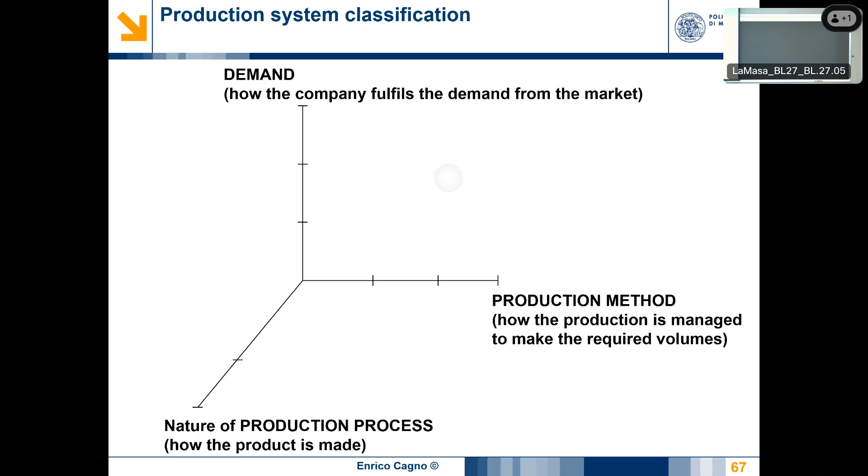If you remember, last time we started considering the classification by the nature of the process, and introduced the differences between process production and discrete production, also referred to as manufacturing, even if manufacturing has in the last years become a little bit more ambiguous in meaning. Within discrete manufacturing, we will find both fabrication and assembly.

What is the idea of process production? Let's make a reference with products. We're referring to the production of basic materials like cement, like gas, like plastics, okay? They are creating, from raw material, starting material for every kind of industry, every kind of industry as we usually know it, because all these kinds of industries stay in discrete manufacturing.

Okay, why this one? Because we start with oil and we transform it into plastics, we start from ore and we transform it into steel. In the end, I think none of us has ever gotten in touch with a steel bar as a final product. But many of you have seen how this bar is transformed through discrete manufacturing into desks, into cars, into bags, into every kind of thing. This is also the reason why process industry is usually seen as a supplier of the discrete production industry.

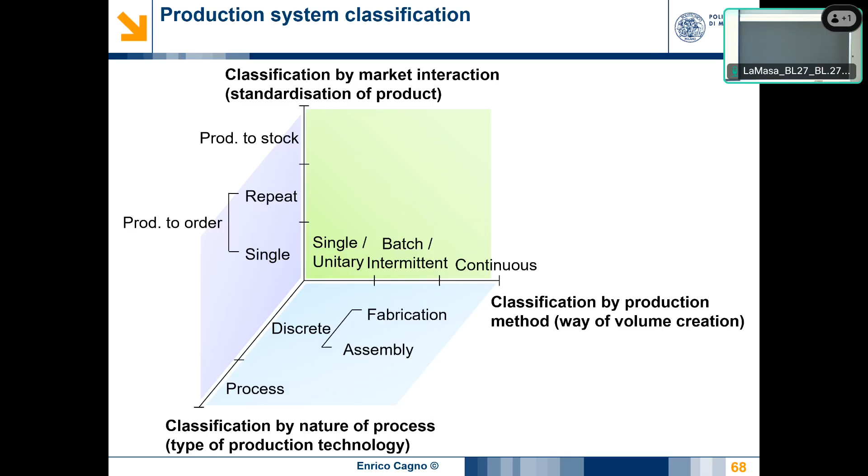Last time we also focused on the characteristics of process production. And we said that usually in this kind of process production, you have one plant for one product, or a limited number of products. If you make reference to a refinery, you have one raw material in, and maybe you can have different products, gasoline, kerosene, whatever, but in the end a very small range of output. With cement, as we said last time, kaolin, whatever, all the ore coming in, and in the end you have cement. Maybe you have different variations of cement, but in the end it's cement. If you go with glass, it's the same. This is the idea.

What is the other characteristic of this kind of process production? It is that the technology route is completely fixed.

So one operation follows the other, and we cannot swap, change, or skip any of them. We have to follow them in a perfect way. The idea is that if we need to warm or heat some of these ingredients, say of the glass or the cement, we have to use that specific temperature, that specific speed of flow.

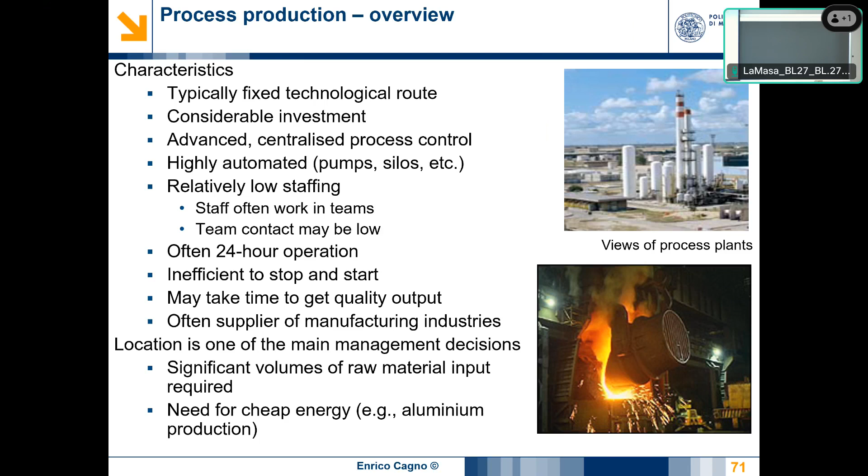If you remember, last time we divided the features of this kind of process production by technology, by management, and by cost structure. We will use these same three categories to analyze the features of all the production processes we are going to see.

High level of automation. The process flow can, to some extent, be flexible. In the end, you have a lot of ingredients put together, so it's synthetic if you want. You can have different kinds of cement or glass in the end—very limited in terms of categories, but you can have different products.

Management, so decisions—what decisions you have to take. We say that mainly we have this relative importance of management parameters. Please remember, you start the machine, you stop the machine. A major decision about how to manage this kind of production system is how and when to make maintenance. This is the idea.

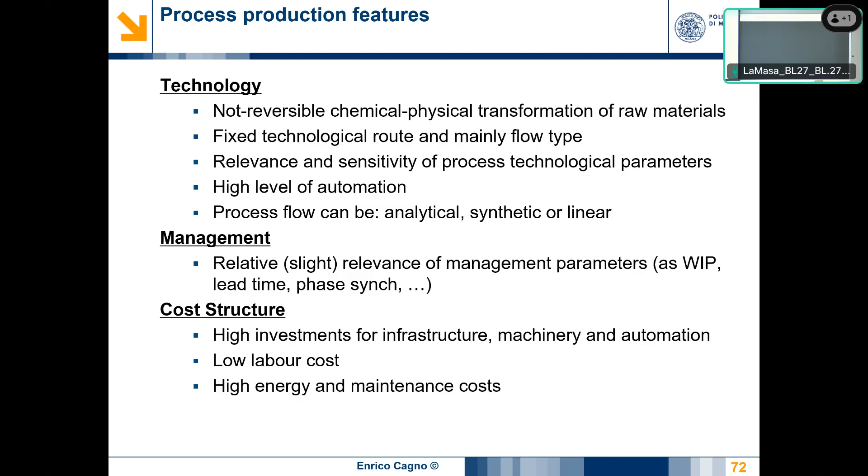Now let's jump into the discrete production. Sorry, these are our examples for nylon and cement.

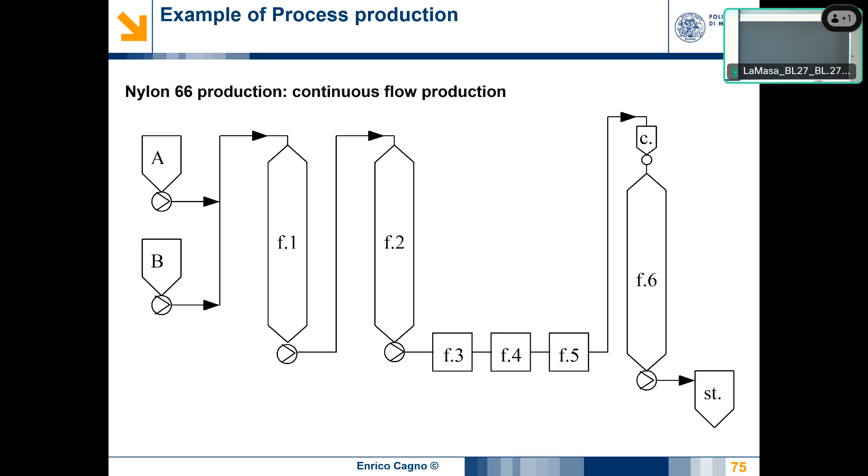So, discrete production, manufacturing—as I told you before, discrete manufacturing or manufacturing. We will make reference to fabrication or processing, and assembly. This is the terminology we are going to adopt.

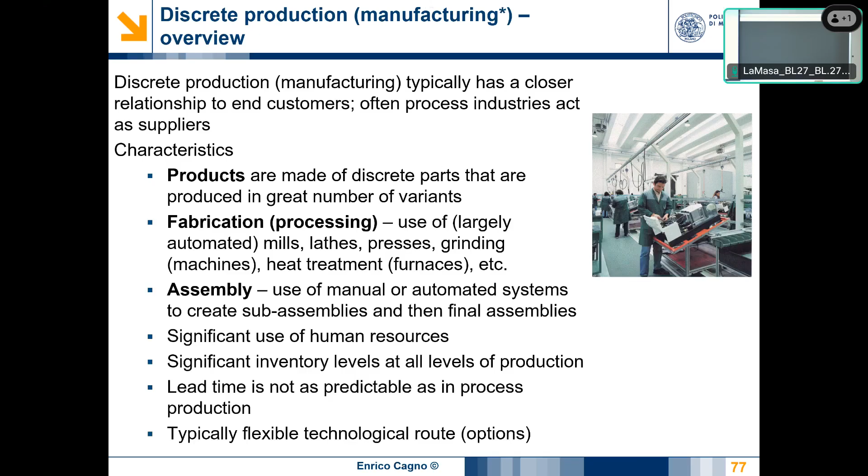Maybe the easiest way is to take a look at this big tree presenting all the manufacturing processes, the microfamilies of technology that can be listed in manufacturing processes. Here we've got fabrications, here we've got assembly. I think all of you can understand which are the microfamilies.

It's clear that material removal is maybe the king of fabrication, followed by the solidification process, but I think all the others are very interesting, together with deformation. The same goes for assembly—it's to some extent a way of fastening and joining components to obtain sub-assemblies or the final product. Which are the main differences among those?

Historically speaking, the main difference between fabrication and assembly is that fabrication has technologies with transformations that are not reversible. What is the idea? If I remove material, this is a non-reversible operation. If I cut, it's not reversible. If I form some pieces, to some extent I cannot go back.

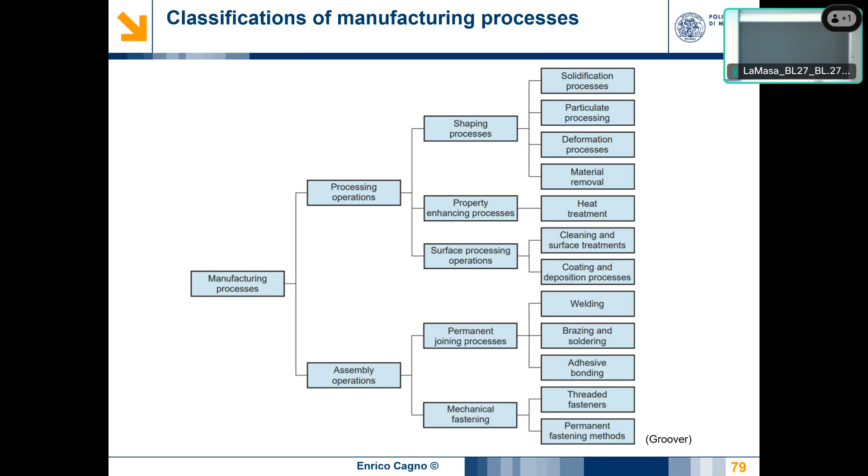Now, if we go to fabrication, again we are analyzing it by technology, management, and cost structure in order to see the difference between process, production, and then assembly manufacturing. We can say that fabrication should be not reversible in most cases.

The other difference, with respect to process production, is that there is no fixed route. Very interesting. If we are back to the camshaft, what if we swap the cutting of the edge with the first run in terms of lathe? Nothing, because we obtain the same product. Maybe it's always better to cut it, head it, and then start turning. But this is an optimization of the process. It is not due, because at the end we obtain the same object.

Maybe with the first one we are less rejected, we are faster, okay, but we can swap some of these operations. Second, I said that a camshaft is usually obtained, at least in the first round of the operation, by turning. Why? Why can't we go with milling? Is it possible? Absolutely yes. Is it optimized? Less. Especially when we have large volumes, it's far better to go with turning, no way.

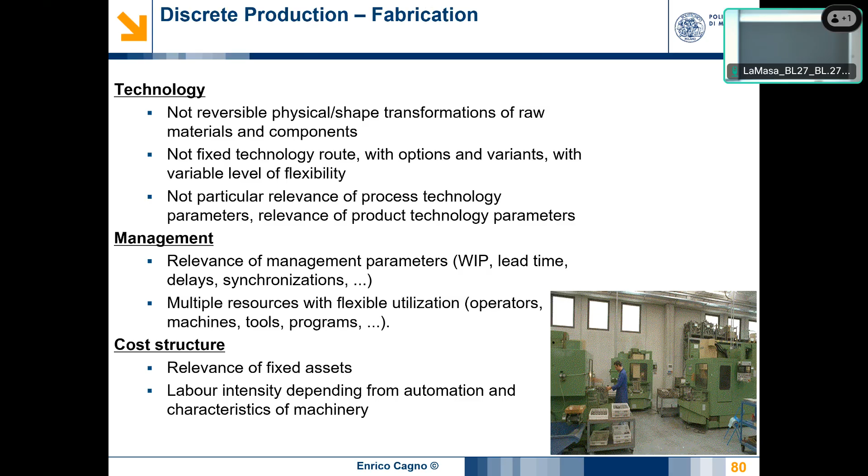Let's go with assembly. Sorry, just to make a note. All this, as I told you before, those of you that followed the course in the 3rd year already know; it is to some extent a repetition with some hints. All the others, if you have problems with this, please come back to me. I will try to repeat the main concepts, but a bachelor student of Politecnico spent some time on this before, so if you need some extras, please come back to me, okay?

Assembly: technology, management, cost structure. Technology, what is the idea? Not completely reversible, but the idea is that if we assemble 2 components, we can maybe separate them. And please remember the definition of discrete production: in the final product, both for fabrication and for assembly, you can recognize and identify the single components. If you see the car, you can see the different components. If you see the single components, it's easier to think that we can separate them, true or not.

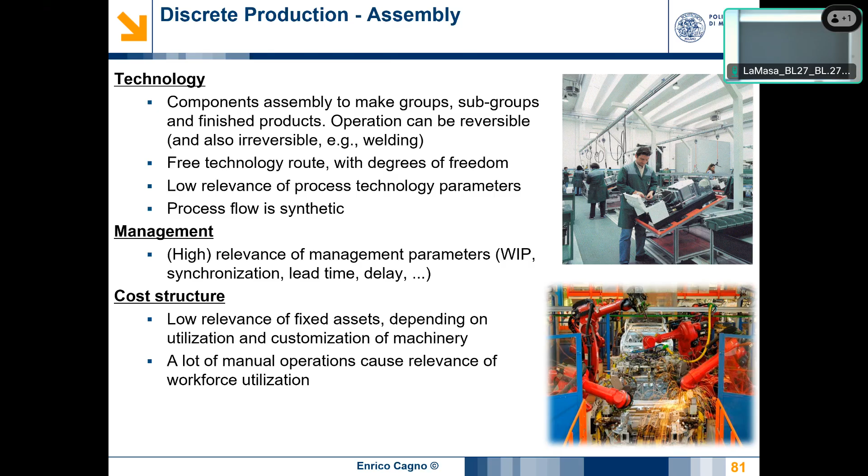Okay, here assembly for planes, assembly for mechanical components, and before that one, we have fabrication. Please also always remember what I told you at the very beginning. If you go into a factory, you can find both process production and fabrication. Process production, fabrication, and assembly. Only fabrication, only assembly, only process production and assembly. The combinations are a number, okay?

And please also remember that you can have process production and assembly, because all the components maybe are worked by a third party, a supplier. So you produce a steel bar in your foundry, and you have all the fabrication operations done by a neighbor, and then they are back for final assembly. It sounds strange, but in the end, usually it's a matter of cost. You try to minimize the cost, maximizing the profit to some extent.

This is the idea. Nowadays, I'm in a litigation. It's called international arbitration, for some kind of e-bike, a bike with batteries, with an electric engine. Because they have to understand that this bike is sold in Italy, the final part is assembled in Italy, the main body is assembled in Turkey, the main subcomponent is assembled in Thailand, and most of the components come from China. Normal.

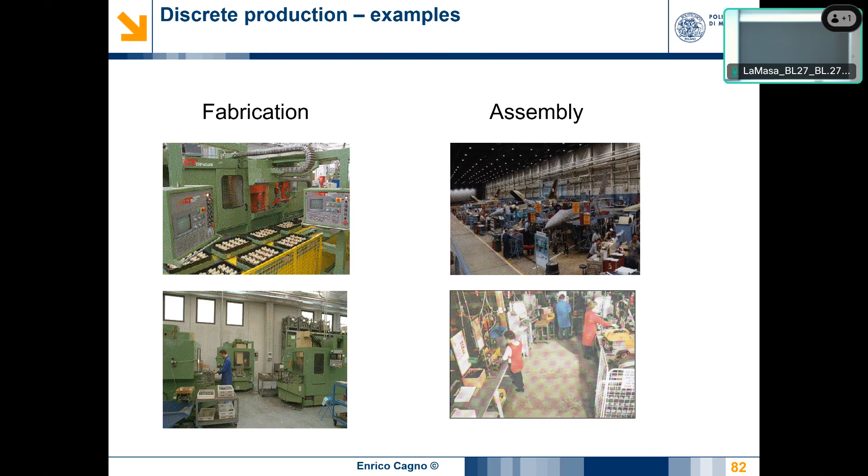Now, manufacturing, discrete production is preferred. Here you have fabrication or processing. Here we have assembly. And these are listed the different main kinds of production systems for fabrication and for assembly. We will use this scheme in order to have techniques for each of them. So I stop here, but in 15 days, I think, we will be back here exactly, and we will start working with each of them.

I don't want to go into it, but one thing, again: in the same factory, you can find process production together with fabrication production, together with assembly production. In the same factory, you can find a job shop together with a transfer line, together with an assembly shop. So we will learn how to design and manage each of them, but most of the time there are hybrid situations, and we will try to think what is the best one. Please remember this, because I need to separate them, but at the end we need also to merge them into the real factory.

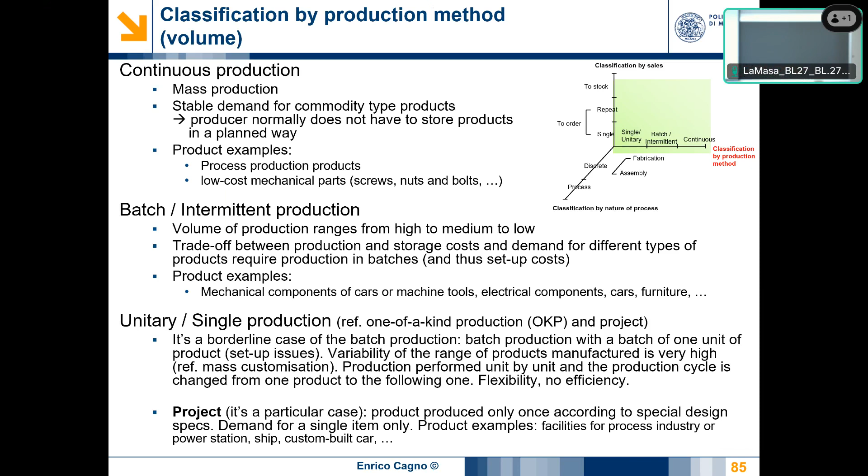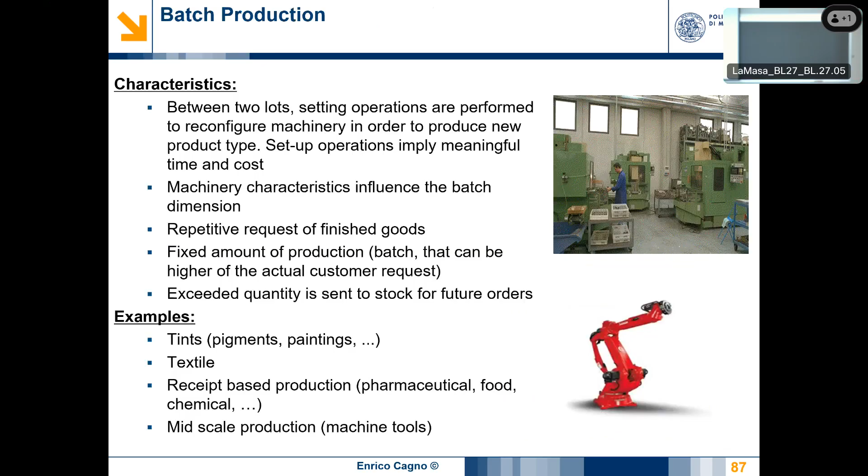There is a correlation between the volume, the annual demand of a product. You see, these are all the products that are requested to my company. I'm making an ABC, so the most requested, down to low volumes. The first one is the most requested product, so the volume is big, we have to define it, but say it's big. This is a medium volume, this is low volume. If we look at the quantities, if we have very high volume, we can go for more continuous production. I don't say process, but continuous production.

If we go for low volume, I would prefer, in order to saturate machines, to have all these products made on the same machines with a setup for changing from one to the other. So I have to produce, say, 100 pieces of 1,000 different models. All this set of products will be produced in this part of the plant, so I need the setup for changing from one to the other. After that, we have medium volume. Now we are going to develop this concept. But please remember that the quantity required by the market has a strong impact on which kind of production system we can adopt.

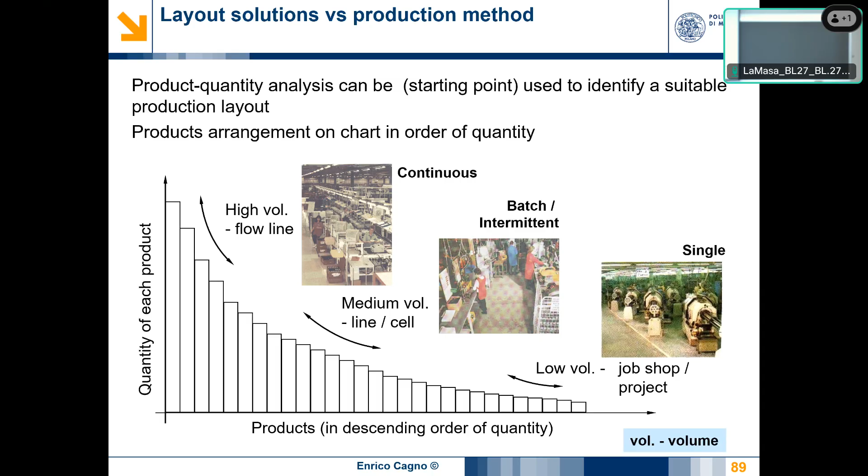Now, classification by market interaction. So I'm producing for somebody. It could be a final customer, could be an industrial customer, so the ring after mine on the supply chain. Here you can see that there are two main ways of responding to the market. One is to stock, the other is to order. What is the idea? If I'm producing to stock, it means that I will make my production and I will put it in a warehouse. And the client will be served by the warehouse.

To order is exactly the opposite. I'll be waiting for the client to issue the order, and at that point, I will start operations. These are the two different ways. Now we're going to decompose it further, but this is the idea. Either I serve from the inventory, from the stock, or I'm waiting for the order to be issued.

It's not so simple in the end, because if I produce to stock, it means that, if I don't want to go bankrupt, I know more or less what the demand will be. So I can adopt a production to stock system only if I can forecast demand quite robustly. Maybe I can make some mistakes, but in the end, I should be able to. Otherwise, if I produce something that will never be sold, I will fail.

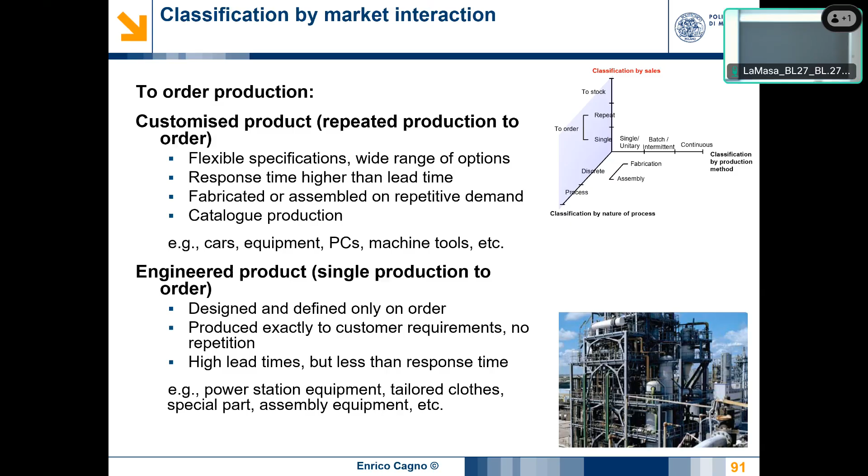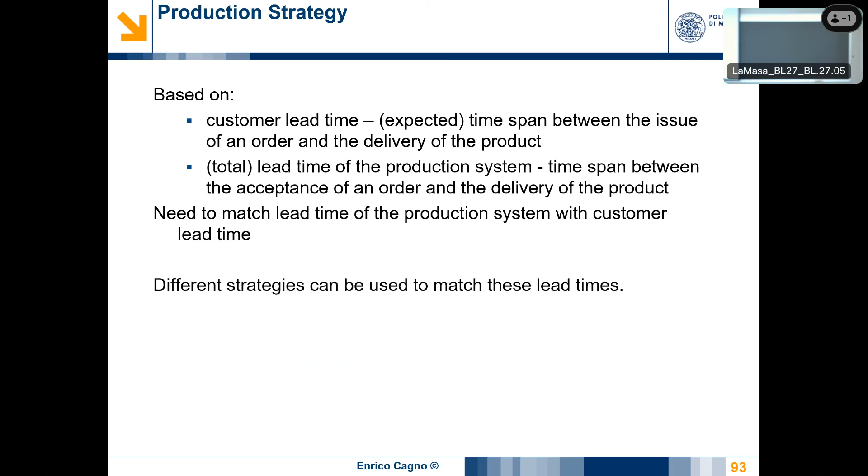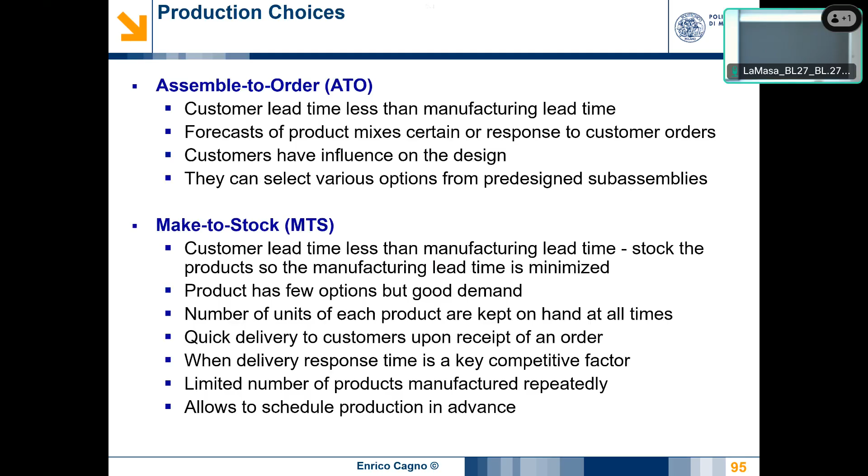We already spoke about this. As I told you, slides are like a book. I took one slide, but everything is explained afterward. If something is not clear, please come back to me, but everything is written in order to have it.

This was the process that McDonald's used up to the end of the last century, and I think all of you know it. You have raw materials: frozen patty, fresh lettuce, cheese. Then there's the process of cooking, the broiler, and the assembly process, standard by catalog, but in the end the client doesn't choose from the catalog. They assemble on the basis of demand forecast, and put the finished good on the rack, a warm rack. The customer places the order and it's delivered immediately. But remember, the assembly didn't wait for the customer order; everything was available in inventory.

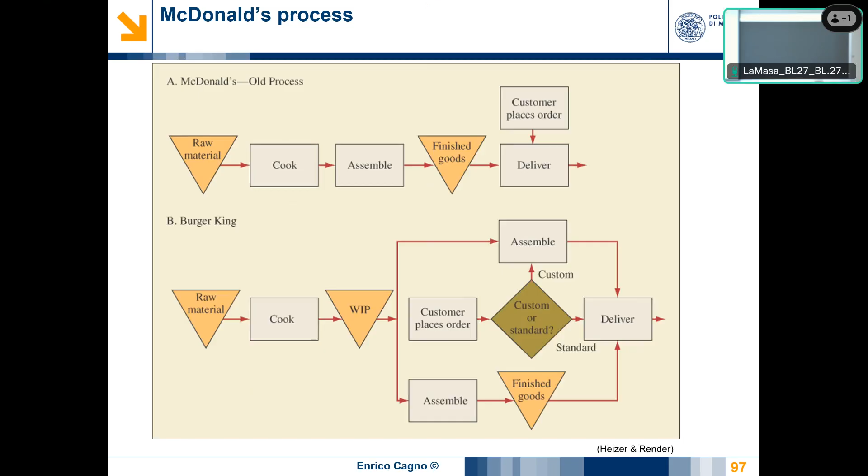So if you look at this one, remember what I told you with this scheme. Every time you go this way, we are to some extent reducing the risk of having products that are not sold. Here we have McDonald's with the final product, here Burger King, and here to some extent Wendy's, because the idea is that the grilled patty is used in every hamburger, so it will somewhere be used. There is to some extent a cancel-out of mistakes in terms of forecasting the final hamburger sandwich.

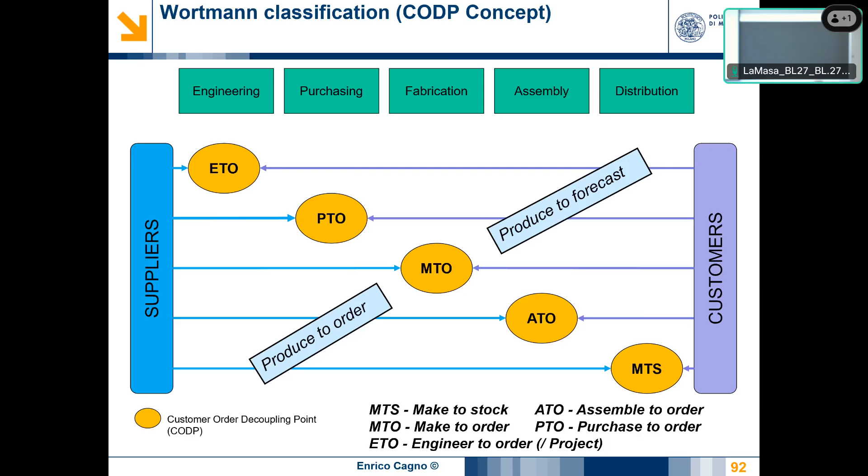Because the patty is used, it's easier to understand. Now, what was the solution? I won't go into detail, but there's also a description. There are some delays. What was the idea of the new process?

Raw material, here, okay, so a new kind of selection. New way of cooking, very similar to the one used by Burger King. A lot of investment into how to keep the grilled patty warm in the right way without losing the crispness.

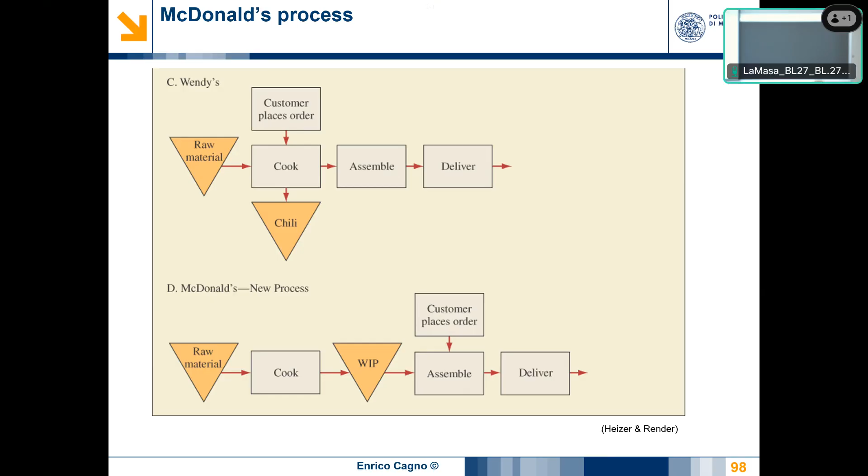The idea is they assemble when the order is placed. I don't want to go into further details, but you see all the process involved in designing it, with video screens and so on. By the way, all the things you see now in McDonald's were developed 25 years ago—exactly, there was a leap in technologies, and Burger King and Wendy's followed. Now everything is nice.

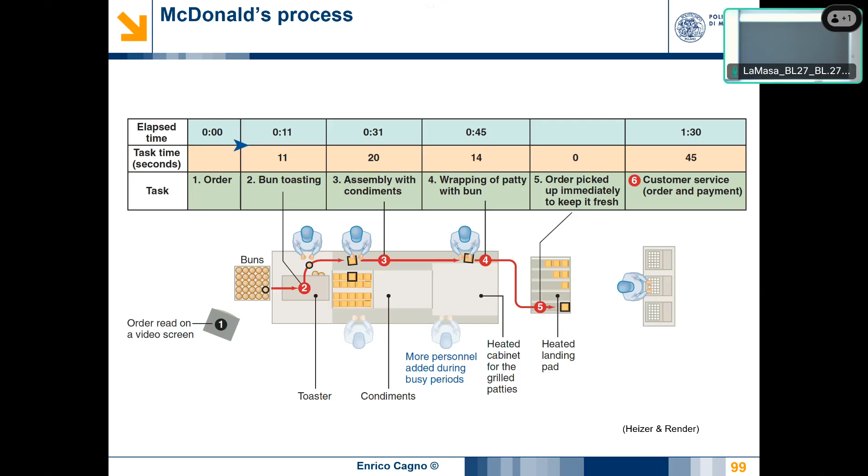We have to understand McDonald's before and after 1999. Before, it was make to stock, pure make to stock. After, with the new process, we move to let's say assemble to order—maybe something is made to order, but let's say it's closer to assemble to order. This was the switch in terms of process.

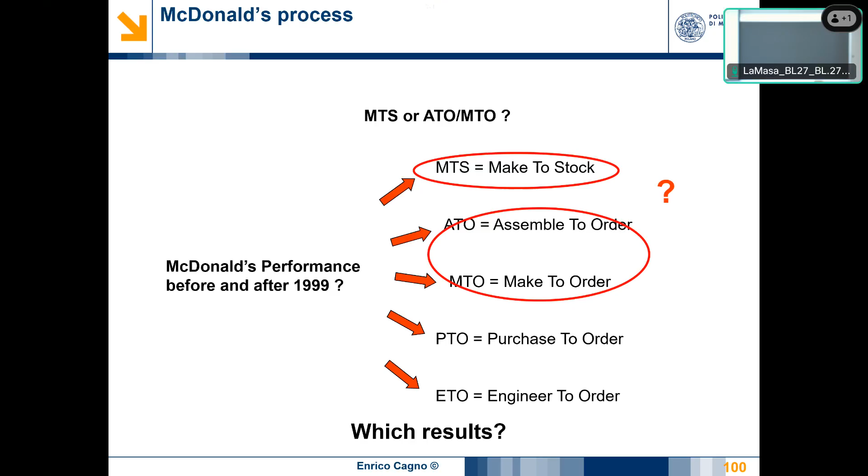So, which results? They ran some restaurants as pilot projects, and in the end they had to measure results before and after. So the criteria were production capacity, quality of the products, flexibility for the client, accuracy of the right things being done, and responsiveness.

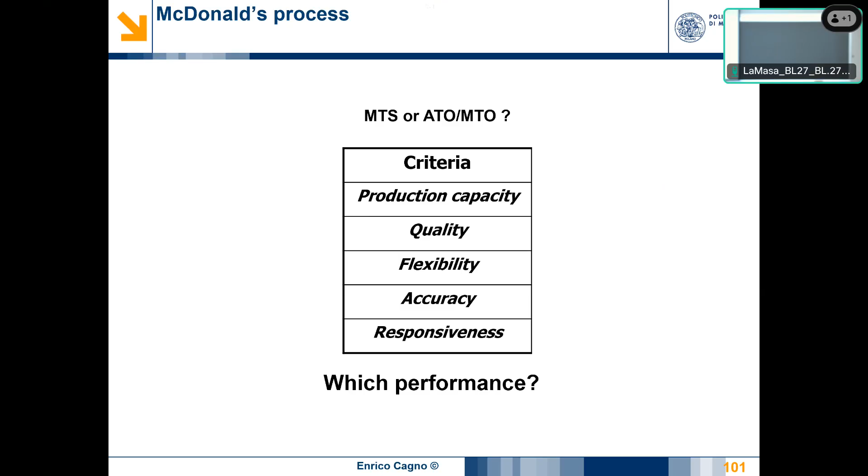Which performance? If you look at production capacity before and after, high and high, we can say that maybe capacity increased a little bit, even though we shifted from a make-to-stock to an assemble-to-order process, but technologies changed in the meantime.

Quality—low, it was a problem, that was the issue. Now it's high, comparable with all the others.

Flexibility—high before, high after, in a different way, but it changed. Accuracy—you know, I never had problems with accuracy, same with the new one. Responsiveness—time, fast food, time for serving, that was high; it was the criteria for success of fast food.

New McDonald's—relatively low. Why? Because with the new process, you have to place the order, wait some minutes, and then be served. If you're a mother coming in with four children, you say, I'd like four hamburgers, whatever you want, give me, I have to feed my children. And the point is that for the customers, this was a big issue for McDonald's.

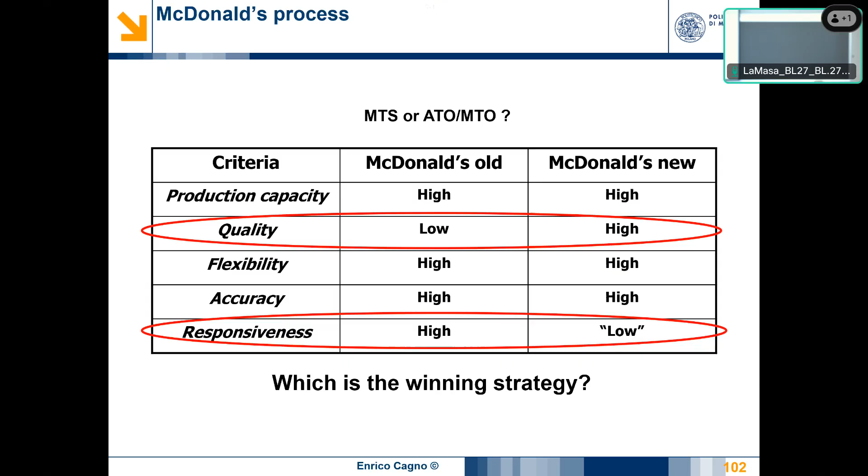In the end, they went back to make-to-stock, but they kept all the technology they developed, readapting it, the videos and everything you see now were developed 20 years ago but readapted to a make-to-stock process. This shows the importance of performance measurement, which we will start in the next block of lessons.

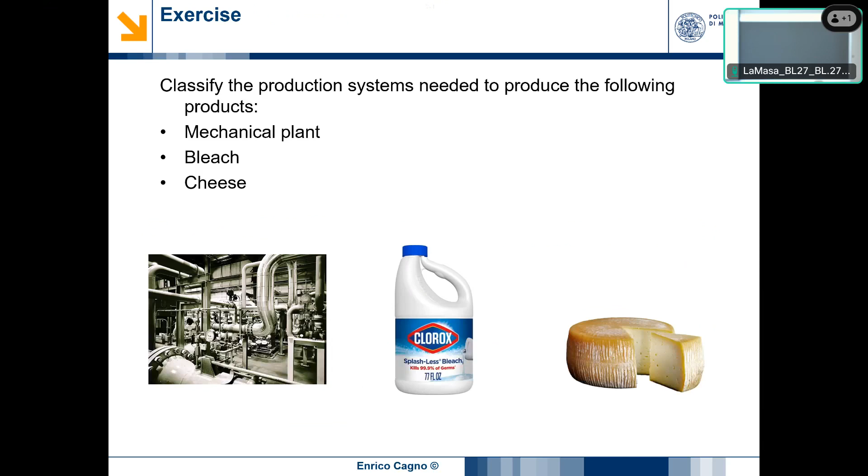So there are some examples if you want, just to...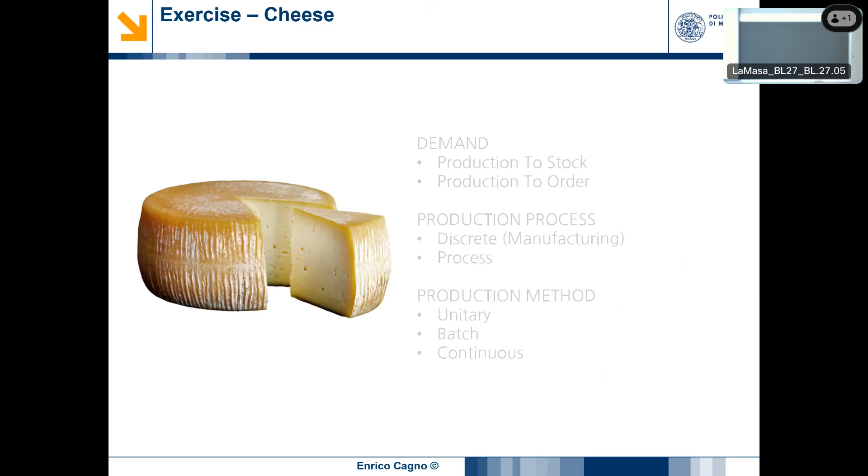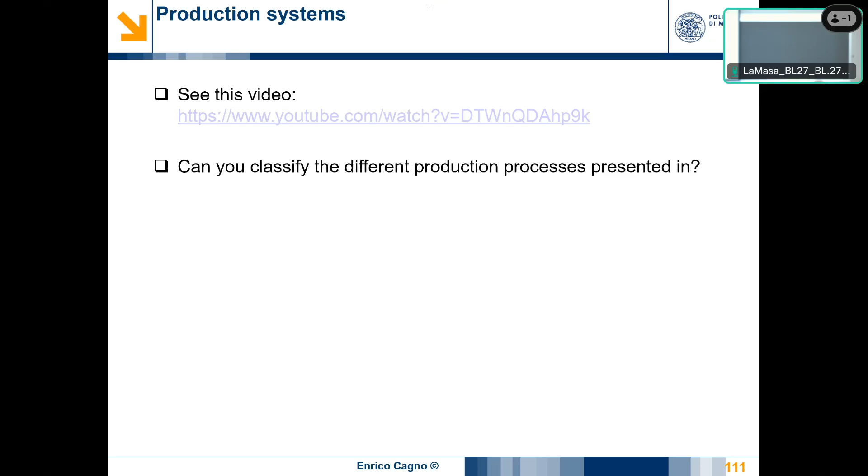Okay, you can have it. Okay. If you have problems with this, there are some videos here. Videos. Okay. With the idea of classifying that one, if you want, take your time. Just do it pretty easy. Yeah? In the end, to make it. Okay. So, see you in a quarter. Okay. If there is any question, I'm here. Again, please remind me to restart. It's my nightmare to forget.

Okay. With this block of slides, we are going to open up a new topic, that is related with performance of production systems, and I would say related products, because in the end we cannot separate, to some extent, production from production systems. Okay, what is the idea about measuring performance? We will see it in a more detailed way, but the idea is that we have to understand what's going on, also because when we have to take decisions, we have to understand if what we are planning to do will drive us to a better or worse solution. Okay.

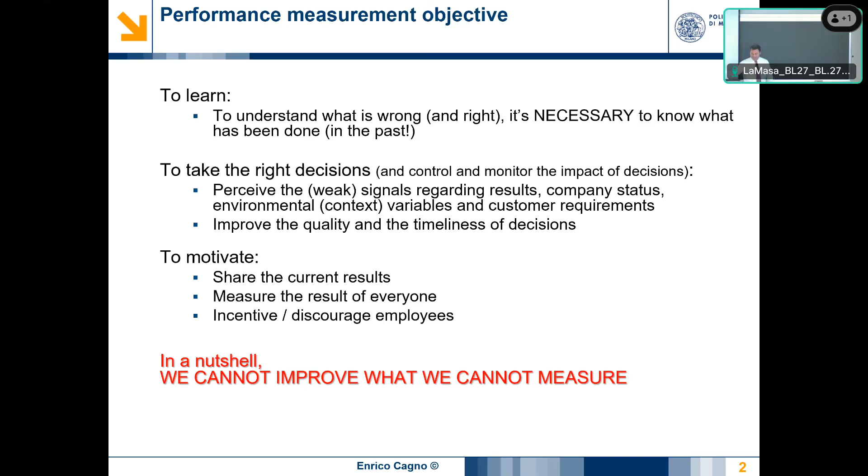Now, the framework. As I told you before, production systems are very complex systems. Machinery, humans, interface, interaction is a mess from that point. And so we have to choose the right number of indicators able to get all the information from these systems, so be systematic.

But please, on the other side, measuring a lot is an effort. So we should measure exactly, but no more than the minimum required. And this is the problem, okay? Usually we refer to this system as performance measurement system, PMS, or performance measurement framework. And the idea is to identify so-called key performance indicators. We have a number of different indexes, as I was telling some of you before.

If you go to the paper about PMS, we tried to understand how many indicators were used for manufacturing companies, and the number is close to 1,200 different indicators. Understanding which are the right ones for a company is a key objective, with the idea that for a large company, more or less 100, 150 could be the maximum.

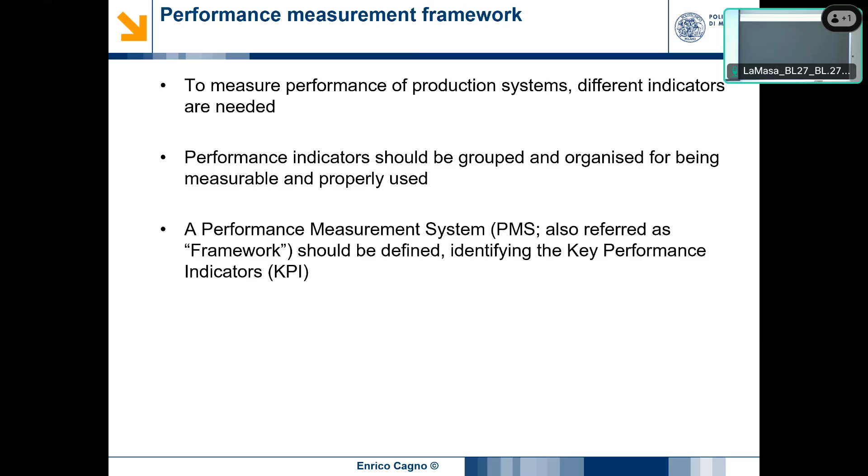I remember some years ago, I was working with Coca-Cola on one side and Nestlé on the other, and they were running with 140 and 120 indicators, indicators that they deploy in different situations, but the idea is that this is the number, this is the maximum. These are large corporations. If you're smaller, eventually it could be, to some extent, shaped in the right way.

Now, what is the idea of what we have to measure? Okay, the set of indicators. Perfect. Second, which is the metric you want to use. You will see that we will introduce some key performance indicators, examples, and in which way we can measure them. Very simple for an engineer, but okay.

The other thing is, which is the frequency of measure? Every year, every 6 months, every month, every day, every second? Nowadays with the information systems that are available, we can measure almost everything. The point is, after that, we have to analyze them, understand, and reuse them. So the idea is that we should have some target also on that one.

And the other point is, yes, well measured, but which is a good performance or a bad performance? We can compare with past data. We can always improve. But the idea is what others are doing, which is the target that we set for the company, and which is the benchmark, if you want, with your competitors.

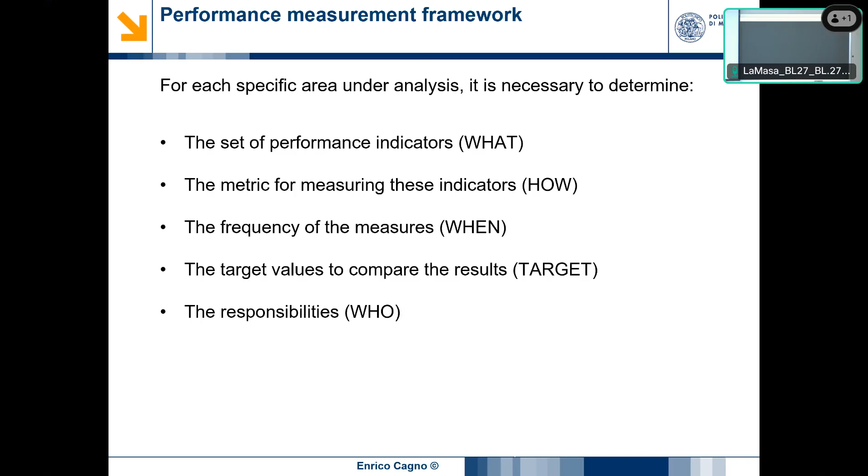Now, distinction. We have to make some distinctions. Some of you already took the exam of measurement. Yes, I know. So some of this distinction already happened, but it is also important here. We have to distinguish between performance and operative conditions, and we don't have to mix them up. So what is the idea of performance? Those are the results of the production systems, measured with a number of different scales, multidimensional.

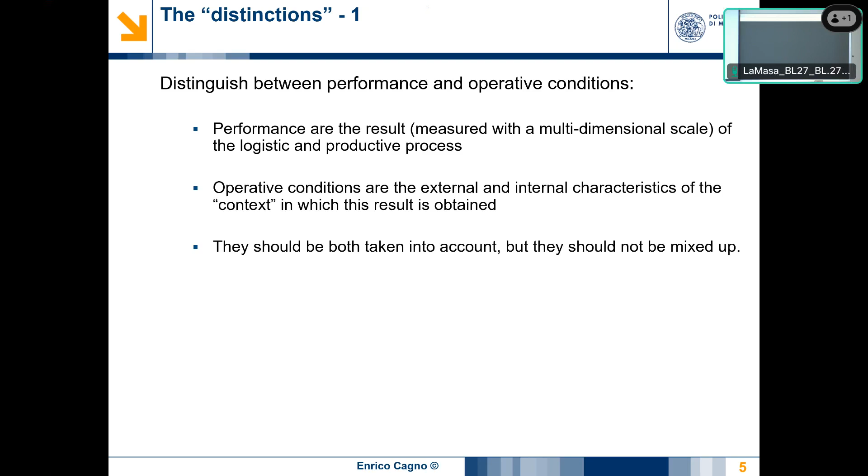Operative conditions are external and internal characteristics of the context in which this result is obtained. We'll see that difference. Just to understand, here we have our production system. Here one of the internal performances could be the percentage of waste intercepted by quality control, the defectiveness. An external performance can be the delivery lead time to produce a compliant product. We have a list of that.

And an internal operative condition is the level of machine obsolescence. Okay, so what is the idea? The level of machine obsolescence is not a performance, but it can, to some extent, impact very much on the defectiveness.

Okay? But we don't have any performance related with operative conditions. This is an internal. And in this example, you can also understand that not only an operative condition can have an impact on the defectiveness, that is a performance, but also this performance internal can have an impact on another performance.

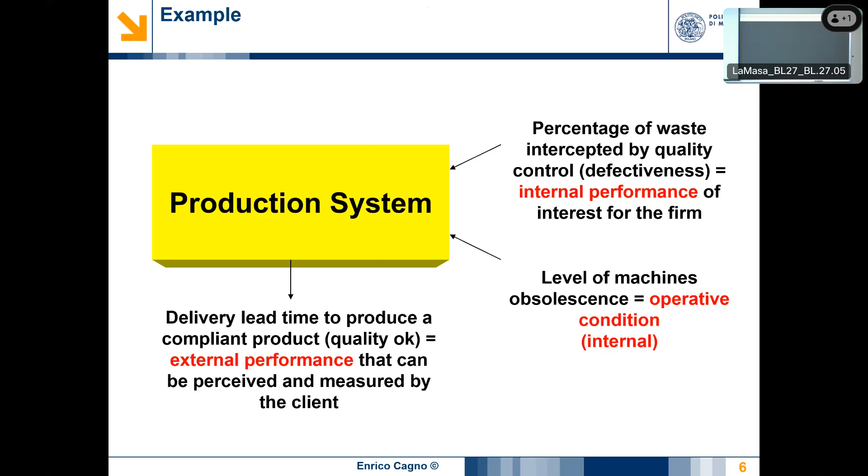Okay, internal and external is always like that. Why is it important to distinguish between internal and external? Easy, because internal is part of your organization. You should have more power. You can have more command on internal personnel, people and the situation. External, you can ask the other company to behave like that. After that, there are also situations where you have suppliers that are so weak with respect to you, you have so much bargaining power with respect to them that they are following you everywhere. But it's a specific situation.

So, external performance: directly measurable from outside of the production systems. Punctuality experienced by the client. And this tells you that if this performance is experienced by the client, it is to some extent much more important than internal, even if usually external performance depends on internal. Because these are directly experienced by the client, otherwise you're not going to sell anymore. Internal performance: performance whose measurement is of specific interest of the company, but not of the client. Material productivities. How much steel, plastic, whatever, I will put for each product.

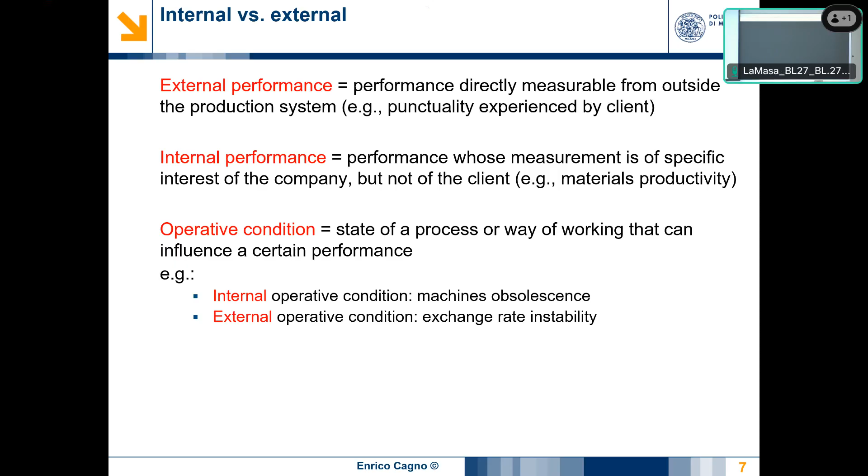Distinction number 2. The point is here, if you think of an industrial firm with the production system side, okay, the same concept of productivity, how many pieces we are creating per hour, has to be applied differently, even if the indicator is the same, the metric is the same, but the concept, I think, is quite easy. If you are applying it to the single worker of the assembly line or the whole assembly line. Why? Because they are working together, they interact, but not in a linear way. So it doesn't mean that if the productivity of A, B, and C is high, productivity of the assembly line will be high.

Maybe, okay, maybe it could be medium. But the idea is that there is a matter of interaction. And the same, the production components, assembly, and the finishing will not reflect the productivity of the whole firm. Because maybe one is working on a 2-man shift, another on a 3-man shift, and we have some synchronization problems.

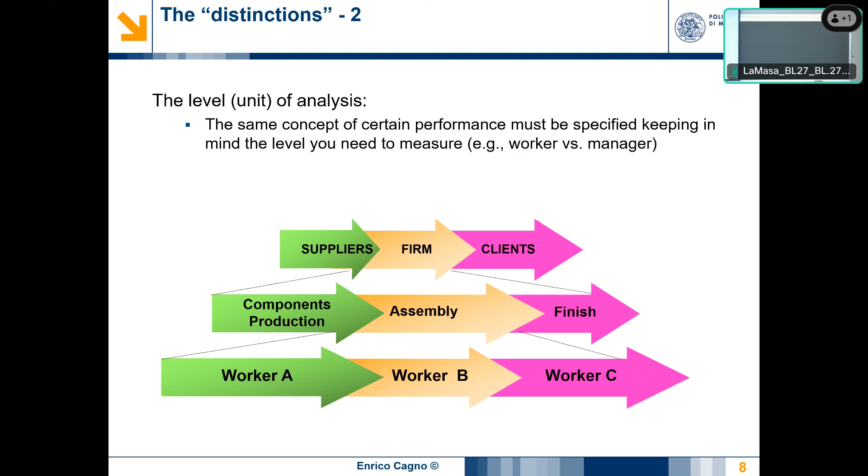Something very quickly, okay, about the design of performance measurement systems. This is to some extent, okay, a little bit more a simplified decision. What is the idea? The idea is that you have some objectives to be achieved, and they change over time. Could be, for example, increasing the production volume or the productivity, if you want, in a specific period. The decision maker has to take decisions, changing over time, that will change the status of the company. Okay? And this company will make some performance varying over time.

I remember, okay, the objective was to increase productivity. We had some problems with external engine production, okay. We had problems with some suppliers about porosity of material. You know that when the tool goes on porosity, it has some vibration and can break, okay.

And on the other side, we had a problem with water, when you use water in the process with oils to have the material removal. What was the problem? On material we had porosity. On water, there was the exchange from drinkable water to surface water. Decades ago, in Italy, there was a specific law that said that companies cannot use water coming from the aqueduct, but have to go with wells.

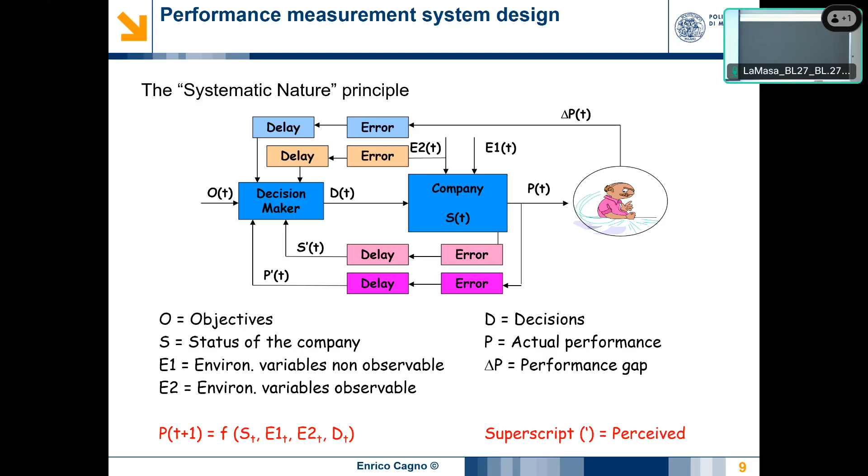Uncertainty principle. Again, what is the idea? When I'm measuring, I'm changing the performance. I think all of you that had the course on measuring know: if you're not using the right tool to measure, if you're measuring temperature with a big thermometer, the temperature you're measuring is the one of the thermometer, not of what you want. When you're speaking about complex production systems, things get worse.

What is the idea? Because we have also the organizational side. So when we measure, we have a direct effect. This direct effect is linked with motivation. What is the example? We need to measure punctuality, so delay in delivering. We have different indicators that we can adopt. But if we choose one indicator or another, we obtain a different performance. One indicator could be average delay.

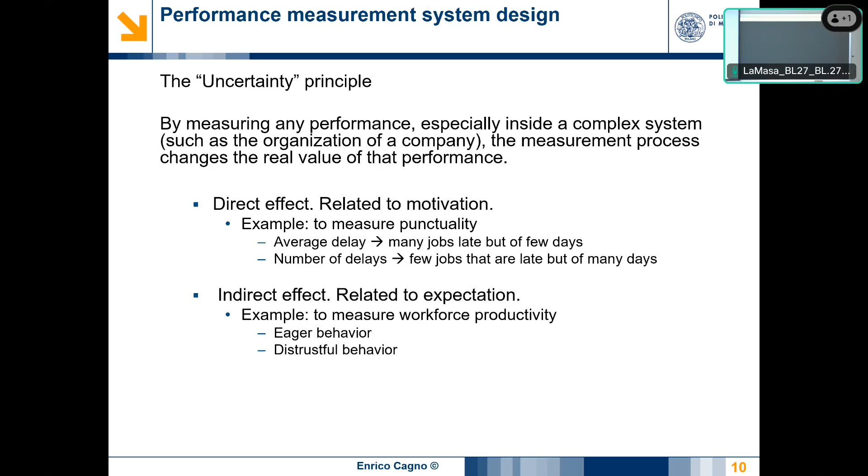Now, always related with design of performance measurement systems: there are some properties that a performance measurement system should have. Some of them we already considered. Timeliness, we said before, so I won't repeat it - we need to have the information returned with a very short delay.

Completeness, I already told about this - the idea is that we have to cover all the main aspects. Oriented to the right period - sometimes this also links to timeliness, but the idea is that I need indicators that don't take into account little fluctuations, but look at the final result. So for productivity, maybe I need an average indicator in order to have a final, good measurement of what we're doing.

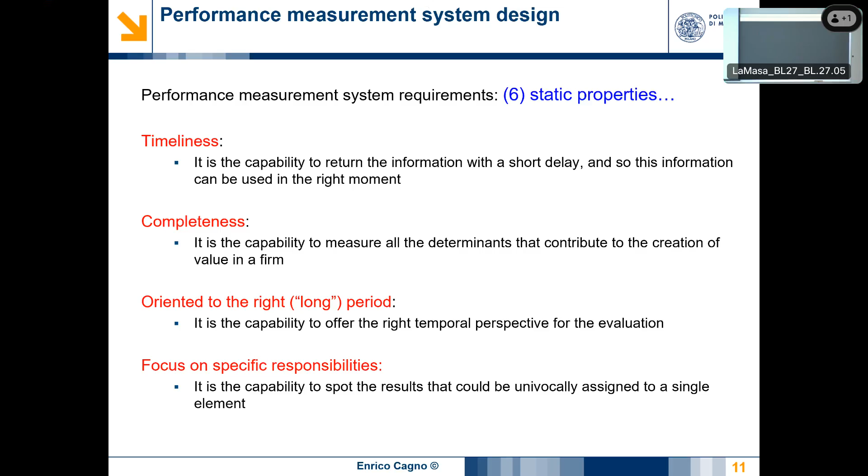Try to focus on specific responsibilities to understand where we have to act or not. Precision: a weak signal should be able to detect little variation in case it's needed. And the last one is so-called measurability - the idea is that we can measure performance as quantitatively as possible, and in a way that is objective. Of the two, I would say objective is more important.

Quantitative is possible because not everything, when you are interacting with organization, can be quantitative. So some of these indicators could be just plus plus or minus minus, just because it's a perception.

These are, let's say, static properties, but there are other two that maybe are more important, the so-called dynamic properties of performance measurement systems. One is related with maintainability.

What is the idea? I spent 2 years, so this is the time needed to set a performance measurement system. I select, I use the metrics, I understand which are the KPIs. I tested 2 years because I need to make at least 2 measurements of the whole. So 2 years are needed.

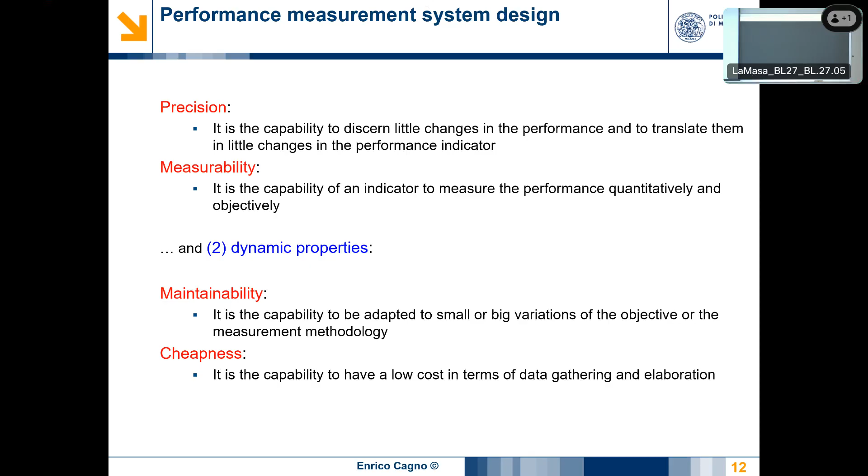Now, something about performance. Again, some of you from the bachelor already saw this scheme, I need to repropose this one. All performance can, to some extent, be reclassified if they are more linked with efficiency or more linked with effectiveness.

So we have to understand to some extent what is effectiveness and what is efficiency. If this vector represents the system output, the kind of product that I'm producing, and the other vector represents the kind of products that the client wants, then it's quite easy to understand that only the projection of the system output on the client needs will represent effectiveness, because you are producing that share that is needed by the client, or have the performance required by the client.

So if we go back to effectiveness, effectiveness refers to how useful it is, so doing the right thing. On the opposite, we have efficiency.

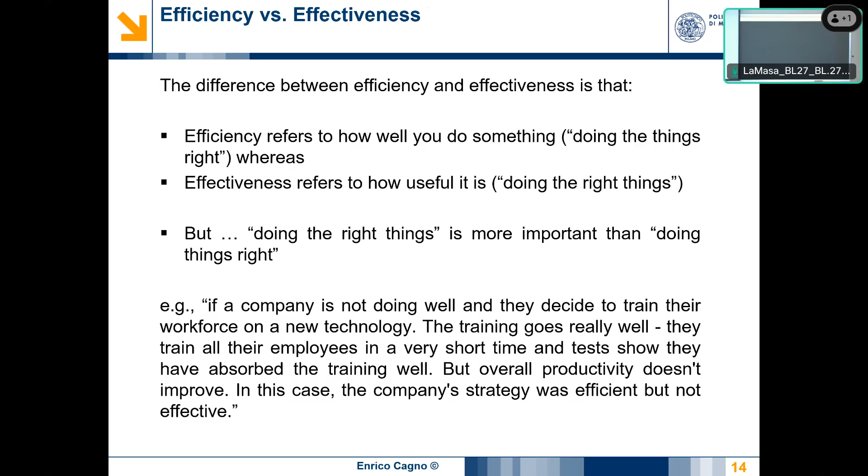Here are some examples, but maybe I can dig back again on the automotive sector, just some classic examples. On this one, it's clear that all the US manufacturers, car manufacturers, at the beginning of this century, produced cars that were not wanted by clients. This was one of the reasons why most of the biggest, largest car producers in the US dropped immediately: the Detroit crisis.

But something is changing. Fiat, let's say after the 90s, not so good. But Volkswagen, they tried to have a lot of brands, a lot of models covering everything. In the end, that was not efficient.

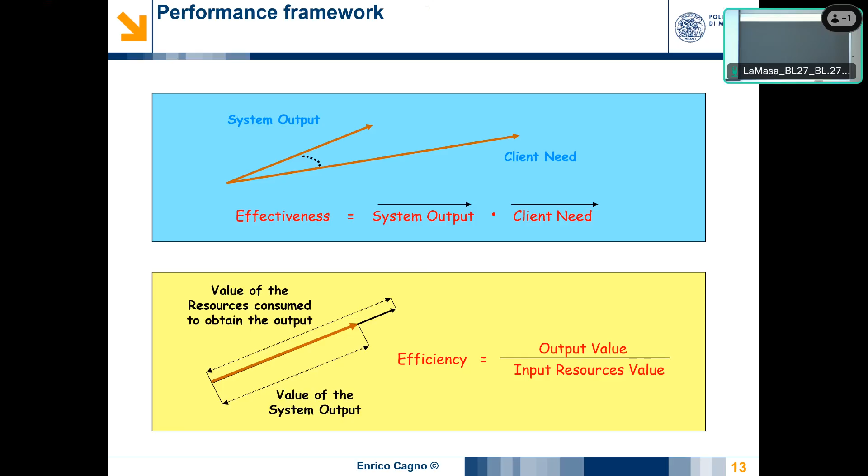We know it from the last two or three years. They were not so efficient because they put too much money into this engineering effort, so that they would never get back from those investments. They were not efficient, okay? Just to understand.

Now this is a performance framework. We'll go through this performance. As I told you, it's limited, but these are the most important performances that you have to control in a production system. As you can see, these performances are in a quadrant of quality, of service, of flexibility, of productivity.

Customization is in the quadrant of service or in the quadrant of quality. In-house compliance is a matter of quality or a matter of productivity. They are overlapped, the quadrants, no way. And the other point is that within the same quadrant, the ones that are top left are more related with effectiveness, the ones that are bottom right are more related with efficiency.

For example, for service, assistance, pre-sale and post-sales, we're going to see now, are more related with effectiveness, more related with external performance, while promptness or flexibility are more related with efficiency, internal performance. By the way, they always have a share here and a share there, but mostly this. So, for example, here I have assistance, pre-sale, and post-sales.

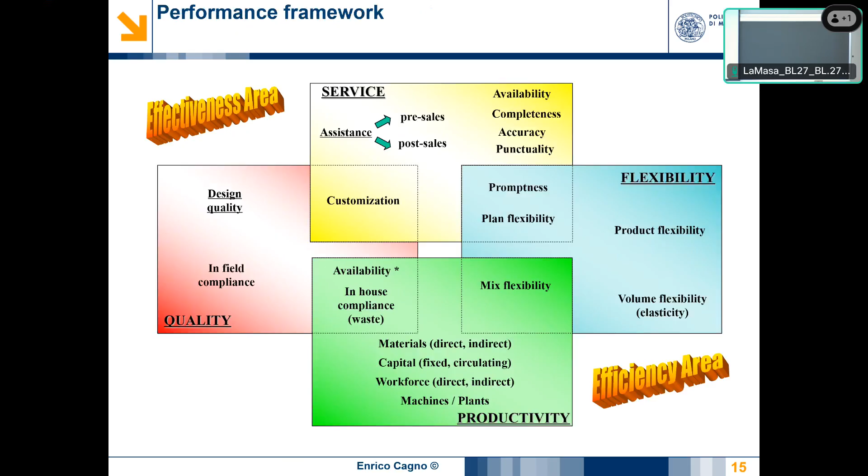Availability, always in the productivity/quality quadrant. Availability with the star, why? We have availability here and availability here with two different meanings. This one with the star, we already met, linked to the concept of reliability with failure. We are speaking about reliability of a machinery, reliability of a system, and maintenance and failures that can happen.

If you remember, the idea is that we have standard physical indicators for single components of the production system or for the whole. Last year we understood how to calculate them at different levels. The two main indicators were mean time to failure and mean time to repair. Mean time to failure is the time when machinery or a system can produce. Why mean? Because usually you have different times of good production, so you take an average to have more robust data.

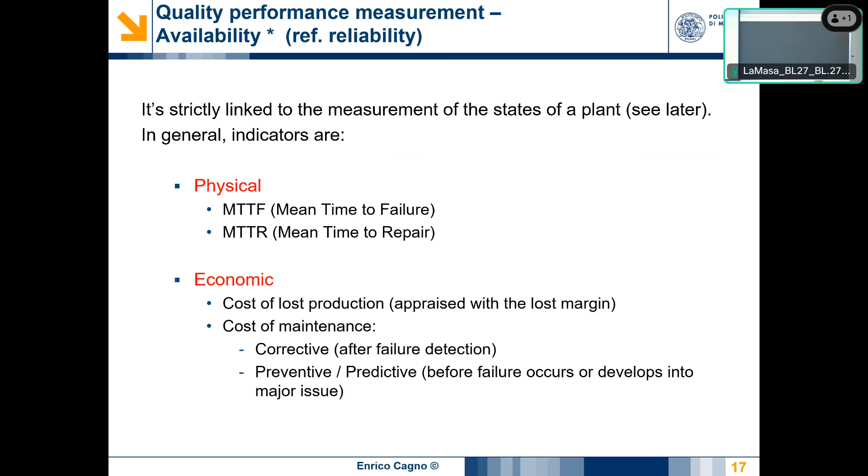In-field compliance. What is the difference between in-house and in-field? In-house, what is happening internally. In-field means that your production systems or your product is already in the hands of the client. So this is perceived by the client. This is why this is, to some extent, a measure of strategic importance.

So it's a matter not about how many scraps, rejects, waste I made producing that car, but how many times that car is going to stop or fail when it's out, or how many times your production systems that you deliver to your client are going to stop for failure. Okay?

Some indicators, physical and economic. If we look at production, number of returned products. I don't like this PC, this phone, please have it back. I don't like this car, please have it back.

There are some policies for returning goods. Some are contractualized, some others are weaker. Another very good indicator is the number of interventions under warranty. Why?

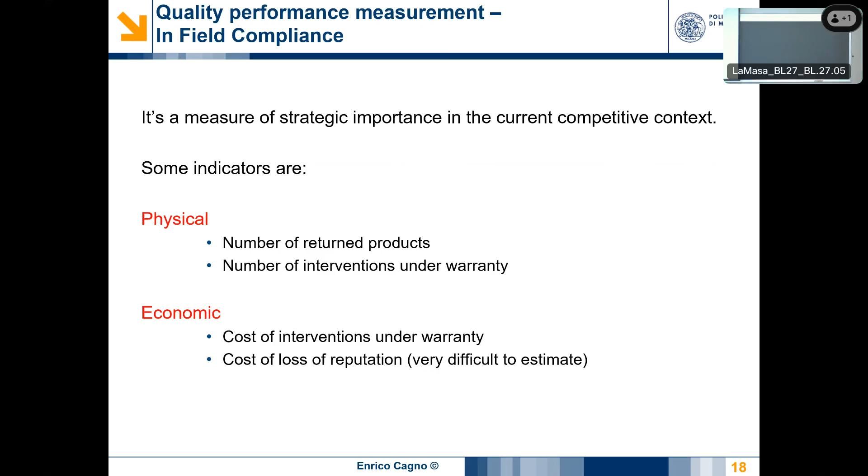Customization, okay? My production system: how many products, variants, models can it offer according to special design specifications of the client. This is the point. Here there is the role of research and development, because please remember that all the variants of the models have to be engineered before and provided to the clients.

So when I speak about modules that you can compose together in order to have different configurations of the final product catalog, in the end, it is something that you have to engineer before. And the system needs to support such configuration while being efficient, okay? And so here we got physical indicators, essentially. Very difficult to go with economic ones, because in the end, you have to go back to understanding which is the cost of R&D.

The example that I made you before about Volkswagen Group: after 7, 8 years, they more or less understood that they were under, okay? It was easy to understand because for car manufacturers, shareholders look at the profitability of stocks, and they see that Fiat, Stellantis, Ford, and the others go with more or less 6% per year, and Volkswagen goes with 4.3. And why? I go back and say, I understand we invested too much in research and development in the wrong way. So in the end, measuring day by day this way is very difficult.

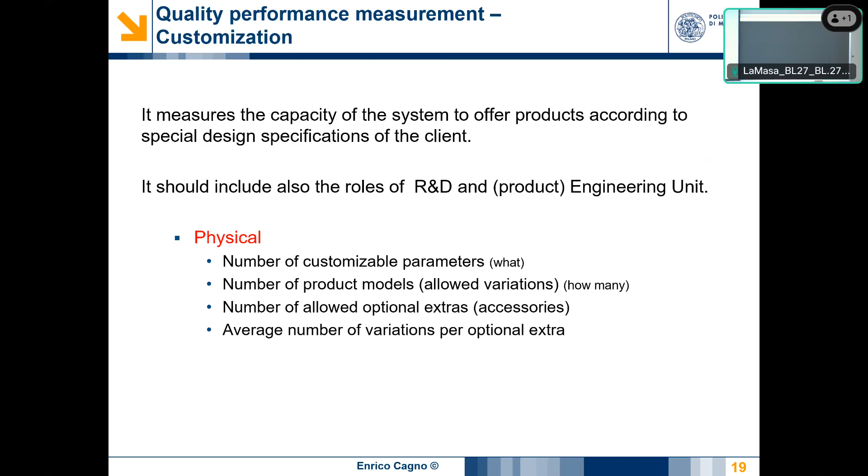Back to service. Now, when we speak about performance related with service, we should separate a made-to-stock system from a made-to-order, assemble-to-order, etc. Why? Because there are some performances, availability, stock-out persistency, that are peculiar to made-to-stock, because they are related with the warehouse. After that, there are some others, promptness and punctuality, that are typical of made-to-order.

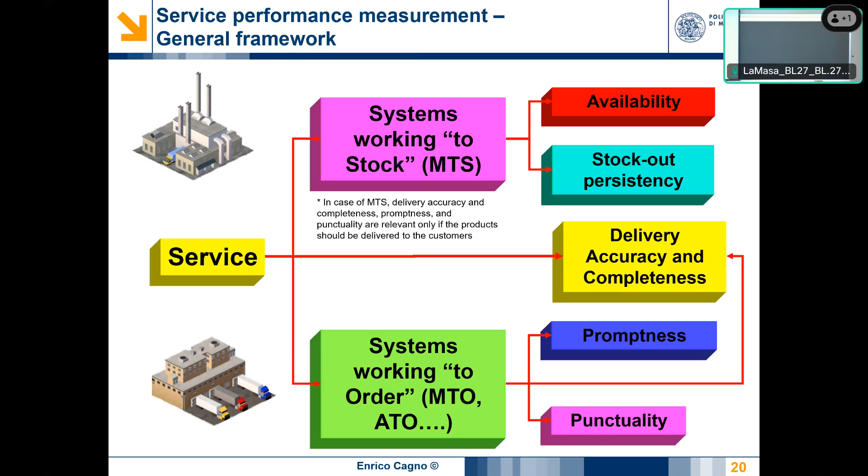Nonetheless, if we look at made-to-stock, delivery accuracy, completeness, promptness, punctuality, all these performances could be considered if the delivery is in charge of you. So maybe I got it available in stock, and I have to deliver in 2 days. So punctuality is important, accuracy is important, completeness is important. So in case delivery is included in a made-to-stock system, we can have these considered there too, okay?

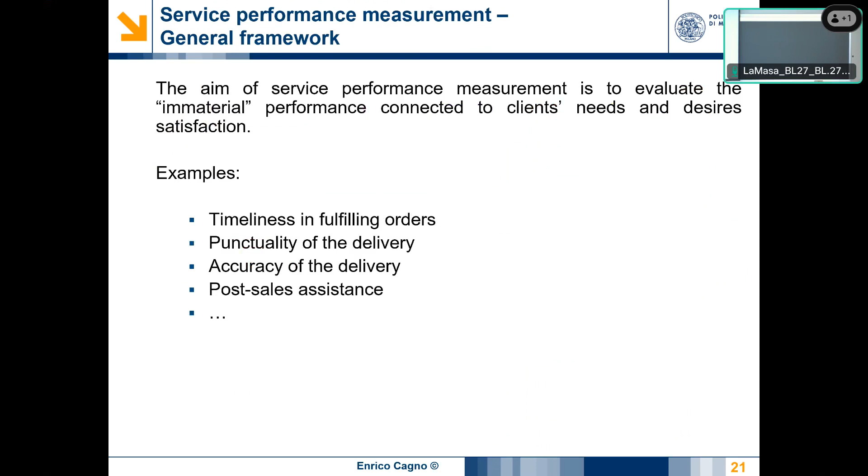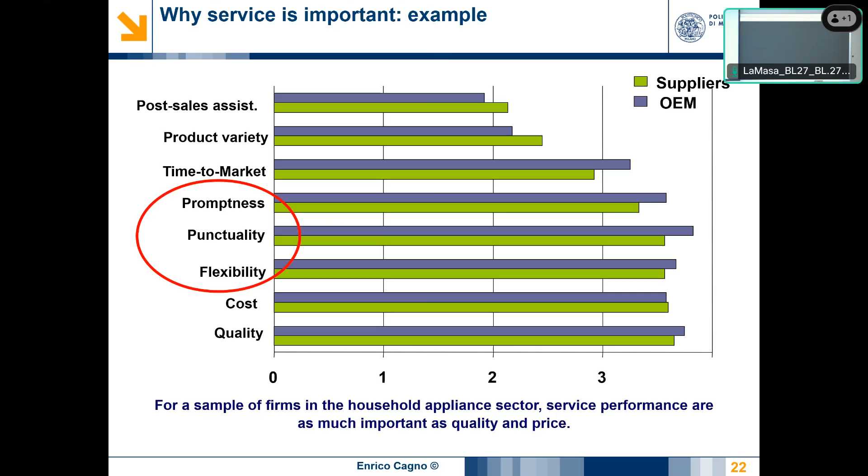Now, accuracy or precision. Accuracy means that we are delivering the order lines that were required by the client. Accuracy means that we are making fewer mistakes, or we are sending fewer wrong items with respect to the ones that were expected.

So they required 10 different items, a few balloons, whatever, and when they receive your truck with all the material inside, they compare the expected list with what arrived. When we compare the two lists, if they find limited or no mistakes, higher level of accuracy. So the idea is wrong items sent.

Some indicators: number of mistakes in the delivery over number of orders managed. Or instead of orders, we can use the number of order lines. Both, because maybe some companies or some clients have a large number of order lines with a limited number of orders. Some others have the opposite, so maybe we have both indicators.

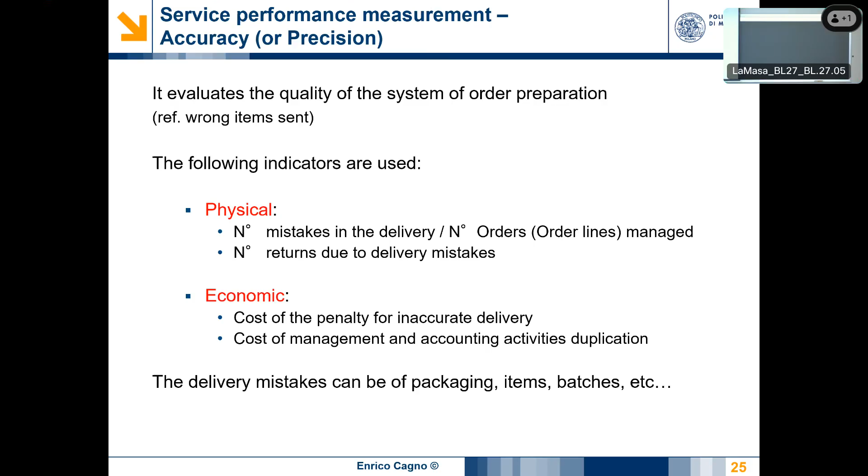Please note that delivery mistakes can be just about packaging, the same product with different packages, or in different batches. So the point is that you have batches of 20 units instead of 10 units. But in the end, this was a wrong item sent.

But if we go with completeness, other indicators, this performance evaluates the reduction in the level of service perceived by the customer in terms of splitting of order fulfillment. So you sent the right thing, but not all. So you need another truck coming to your client to deliver the items that are missing. Please note, with accuracy, you send the wrong one. If you send the wrong one, you need to send another truck to complete.

So usually low accuracy implies low completeness. This is the link between the two. And usually this is measured in terms of physical indicators as the rows fulfilled with the first delivery on the total rows. Or average number of deliveries for each order: how many trucks you send per delivery.

Economic could be the value of order rows fulfilled within the first delivery on the total value of the rows. What is the idea of this indicator? Often our clients ask for a number of items, and usually only the items that have big values are sent immediately. If you have some rows that require some time but have less value, maybe they can be left aside, so we forget to send them. And this is something that is not very welcome by the clients.

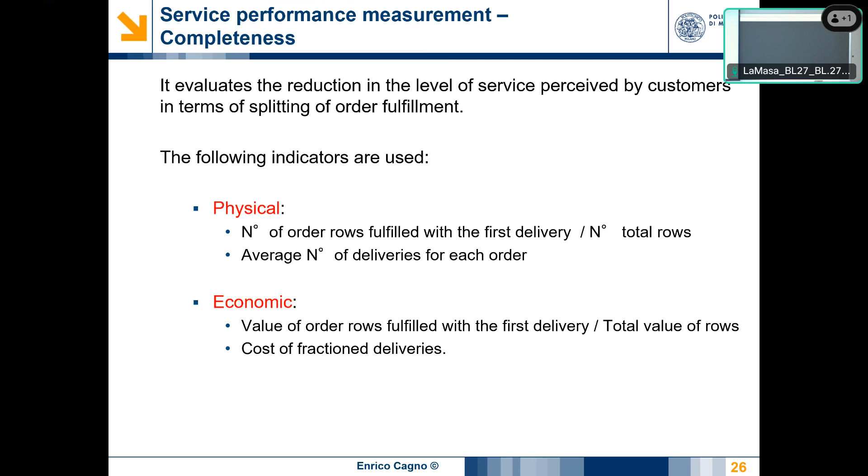Availability, inventory reliability. What is the idea? We are taking into account the phenomenon of stock out. We will find this one many times, but the idea is I, as a client, require something that is not available in the stock.

Maybe you can also consider stock out in a make-to-order model, because I issue an order and tell you I want you to deliver by May, and you respond, I will not be able to satisfy your order by May, but I will satisfy it by July. So the point is that you already finished your capacity till May, so you will be able later. And this is a stock out if you are in a make-to-order model.

Now, physical indicators. Number of items in stock out on the total number of items that you have in the warehouse. Number of orders filled on the total orders. Sorry, it is different, because with items in stock out, maybe I have a high pile of this, but the point is which items. You have 10 items in stock out among millions of different pieces.